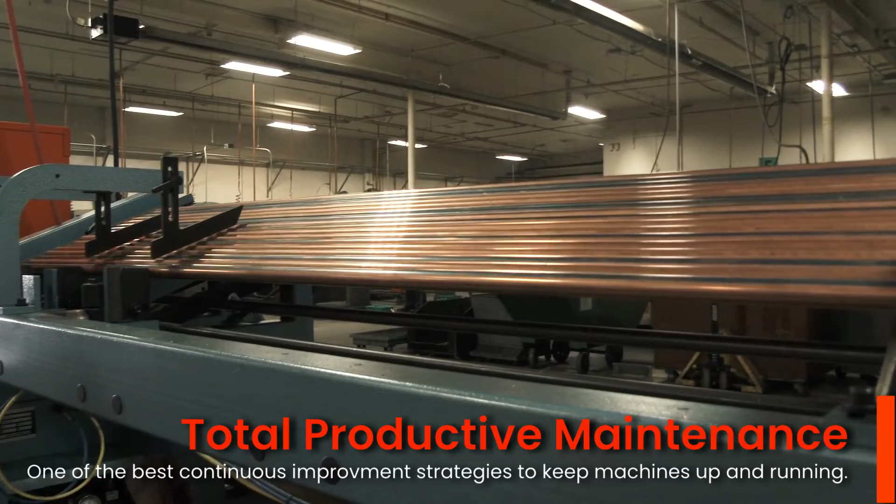So, how do companies combat this challenge? Most organizations utilize a strategy known as total productive maintenance. Total productive maintenance, or TPM as it is often called, is one of the best ways to keep an organization up and running. Total productive maintenance is a maintenance strategy which focuses on achieving improved performance, reduced breakdowns, and better quality through preventative maintenance and effort of employees.

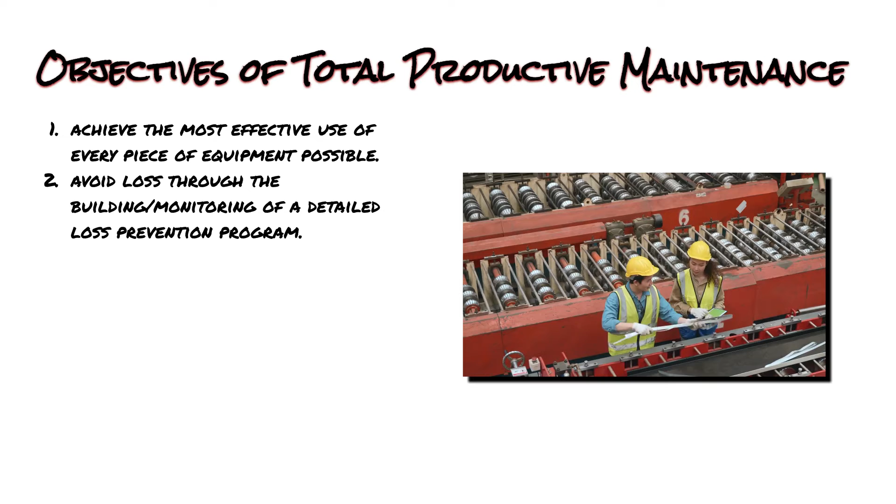TPM really focuses on a few main objectives. The first and most obvious is achieving the most effective use of every piece of equipment possible. Next, TPM tries to avoid any type of loss through the building and monitoring of a detailed loss prevention program.

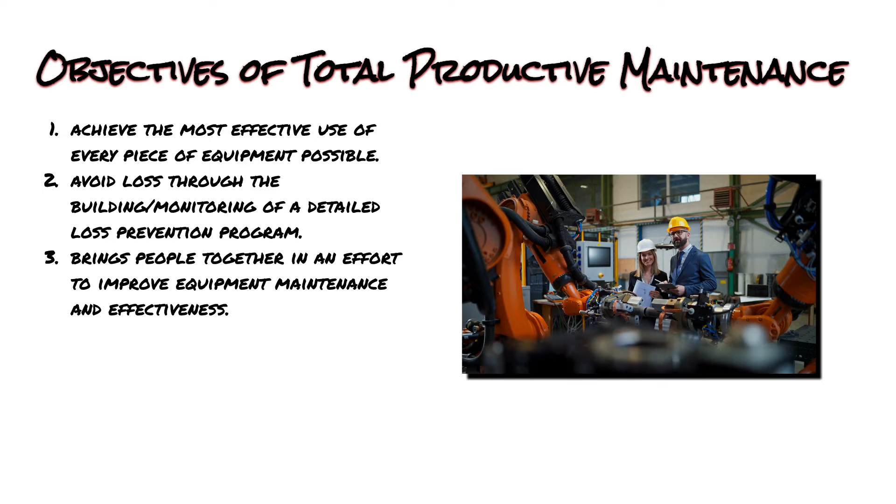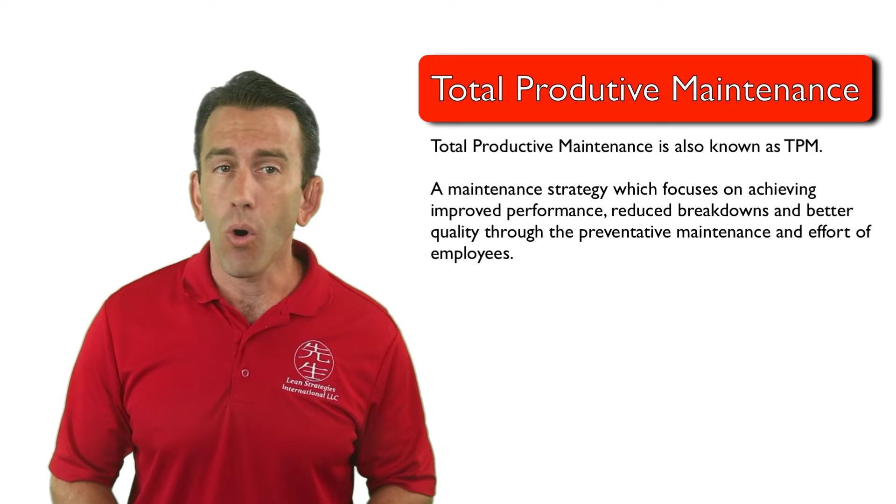As with any type of continuous improvement strategy, TPM also seeks to bring people together in an effort to improve equipment maintenance and effectiveness. This requires the support, consensus, and cooperation of everyone from the top down in an organization. It also requires an organization to adopt a team-based approach in the effort to achieve absolutely no losses in quality or machine downtime. The strategy is based on 8 pillars.

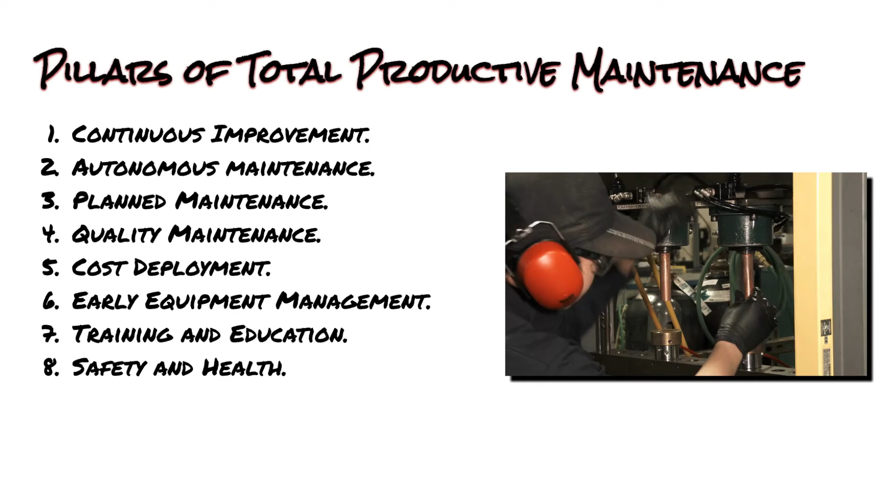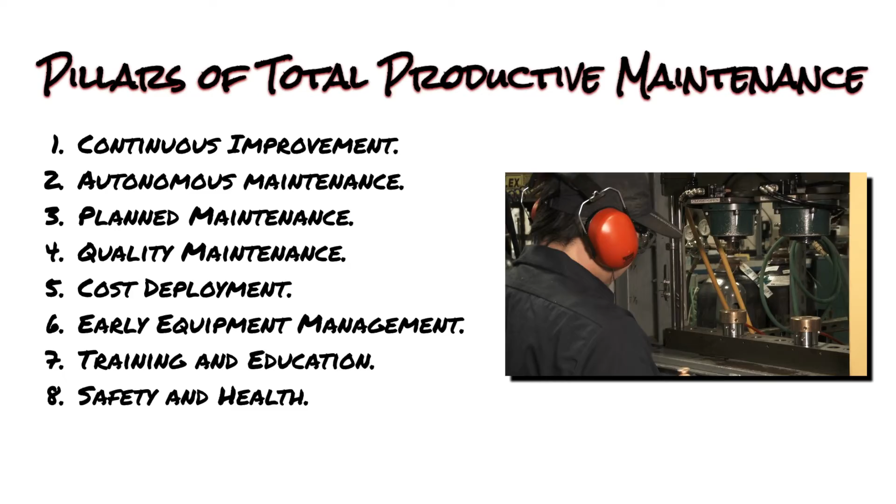Those 8 pillars are continuous improvement, autonomous maintenance, planned maintenance, quality maintenance, cost deployment, early equipment management, training and education, and safety and health. As you can see, TPM can improve the overall equipment effectiveness through many different approaches that will involve and include everyone in an organization, especially people on the front lines or at the Gemba.

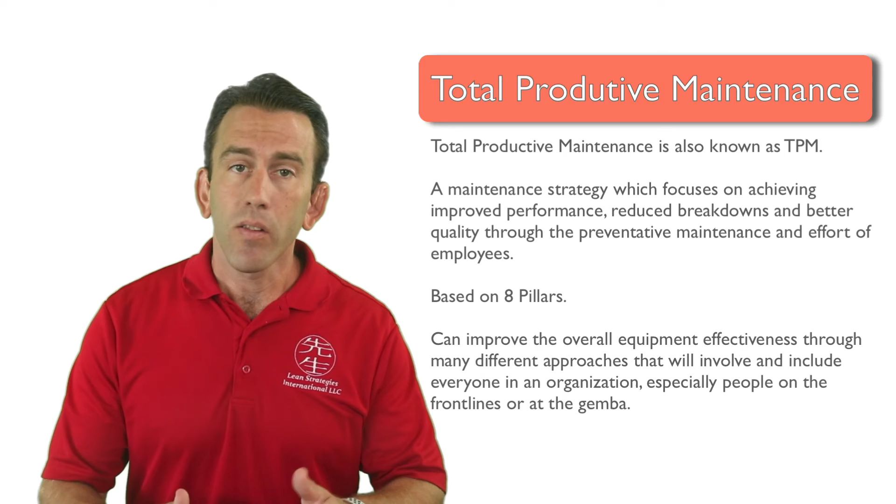And that's it, a very basic introduction to total productive maintenance. We'll see you in the next module, where we will look at one piece of the TPM puzzle.